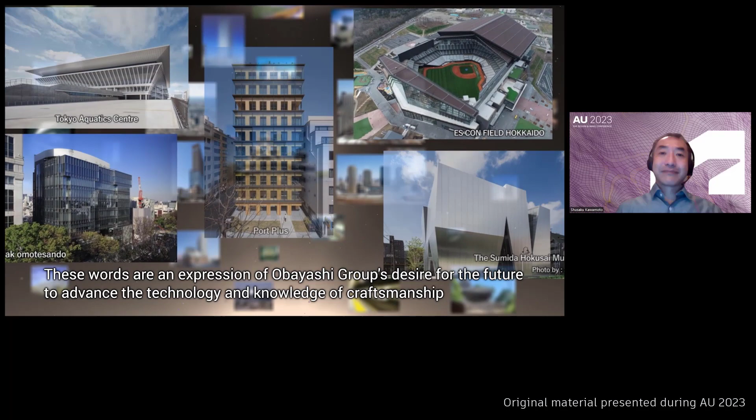Make Beyond: transcending the art and science of making things. These words are an expression of Obayashi Group's desire for the future to advance the technology and knowledge of craftsmanship we have cultivated over our history towards a new level that is in line with the current times, and achieve growth that goes beyond the existing business framework.

To contribute to realizing a sustainable society as stated in the Obayashi philosophy, the Obayashi Group outlines its 2050 vision in the Obayashi Sustainability Vision 2050. Towards the realization of sustainability of the planet, society, and people, the Obayashi Group will continue to take on the challenge of ceaseless transformation driven by talent and innovation to keep providing a variety of solutions for the sustainability of places where we reside, spaces, cities, and the environment.

What we are going to talk about is how we achieved a digital twin and single source of truth among various stakeholders in this large and complex project. We will be introducing specific use cases of Autodesk solutions covering these three topics. Hopefully, at the end of this class, we will have a better understanding of how to utilize digital tools to collaborate towards our sustainability and productivity goals.

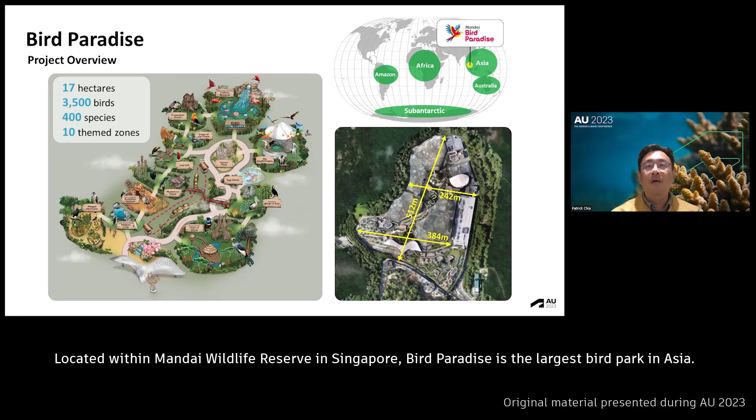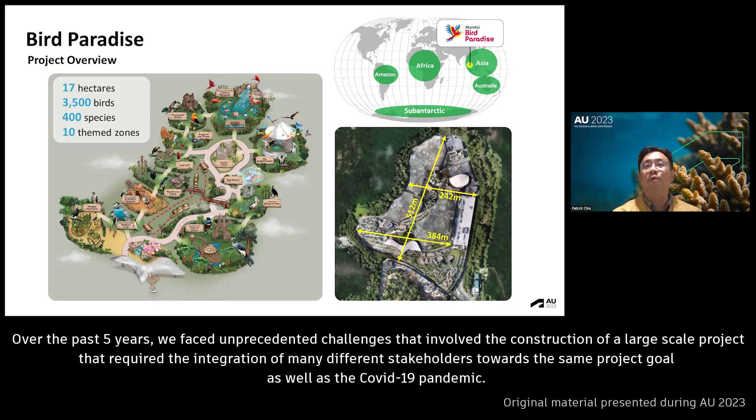Located within Mandai Wildlife Reserve in Singapore, Bird Paradise is the largest bird park in Asia. It replicates different habitats from around the world. Over the past 5 years, we have faced unprecedented challenges that involve the construction of a large-scale project that required integration of many different stakeholders towards the same project goal, as well as the COVID-19 pandemic.

We have created a short introduction video. Let's take a look at it.

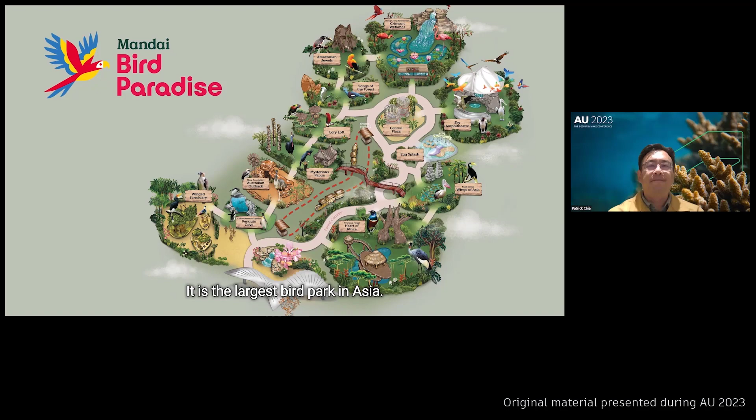Located in Singapore, Bird Paradise is a 17-hectare bird park that soft opened in May this year. It is the largest bird park in Asia. The park is home to 3,500 birds from over 400 species, with 10 themed zones replicating different habitats from around the world.

Visitors can explore 8 walk-in aviaries and immerse themselves in unique habitats at the 17-hectare Bird Paradise. We can also enjoy cascading waterfalls at the West Node or take a walk in surroundings inspired by the Australian outback. The wildlife park, designed to bring visitors close to stunning bird species, will be a platform for the organization to further its education and conservation work in the region.

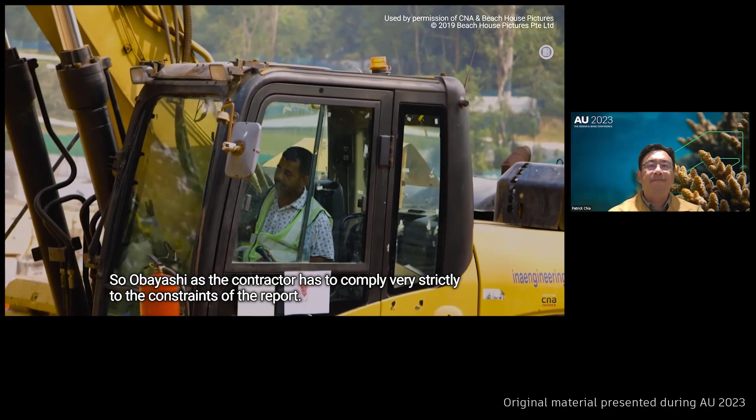The construction of the Mandai Bird Paradise project is a pretty challenging project for the contractors. Firstly, the location of the site is in close proximity to the reservoir and water catchment reserve. Secondly, we have a very stringent environmental impact assessment that has been done, so Obayashi as the contractor has to comply very strictly to the constraints of the report. For example, working hours and the type of machinery they can bring on site to manage the noise level. Thirdly, the need to preserve and protect the rich biodiversity in the area.

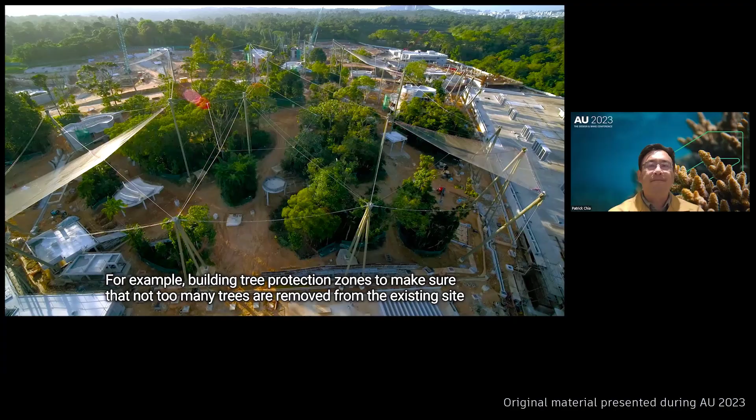For example, building tree protection zones to make sure that not too many trees are removed from the existing site, and then ensuring that there is wildlife connectivity throughout the construction period. In other words, wildlife can move in and around the construction area without hindrances, and also not to disrupt animal welfare at night, so working hours are also constrained.

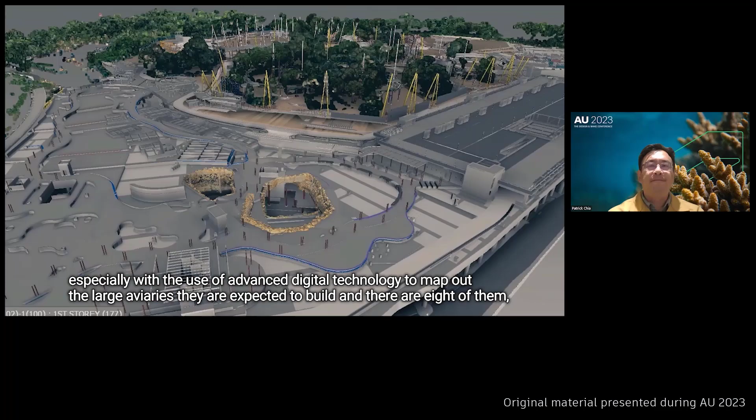I think Obayashi, in their own planning, has done a marvelous job, especially with the use of advanced digital technology to map out the large aviaries they are expected to build, and there are 8 of them, as well as the iconic bird entrance roof, which was very challenging.

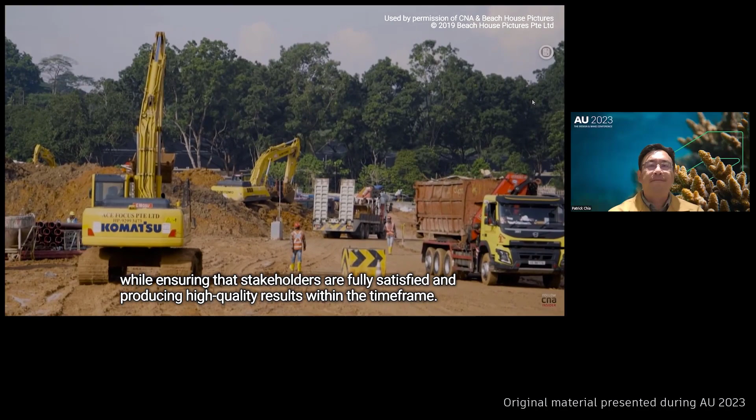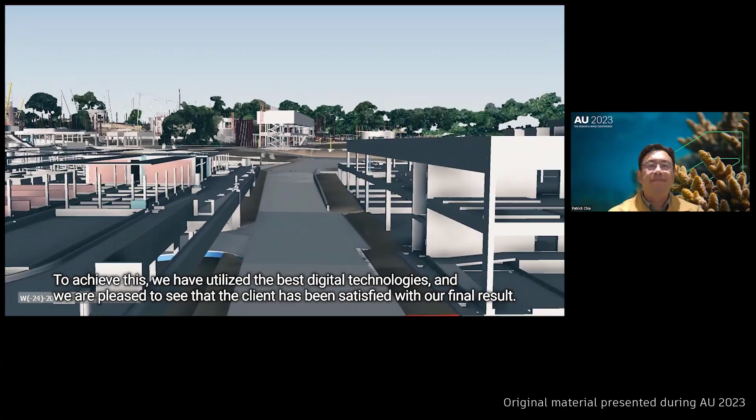Obayashi has been dedicatedly working with the idea of balancing nature preservation and new landscape realization, while ensuring that stakeholders are fully satisfied and producing high-quality results within the time frame. To achieve this, we have utilized the best digital technologies, and we are pleased to see that the client has been satisfied with our final result.

I'm deeply proud of our team's hard work, and I thank you for letting us be a part of this exciting journey. I sincerely hope that Bird Paradise will give everyone in the world dreams, hope, and inspiration. Thank you for your attention, and I hope you enjoy the rest of our presentation.

Let's dive deeper into the challenges and solutions. Nature first is the most representative key phrase of this project, striking a harmonious balance between conservation of nature, biodiversity, and the construction of large complex structures within the same time frame. We also had to collaborate with stakeholders from different disciplines, all working towards a shared objective.

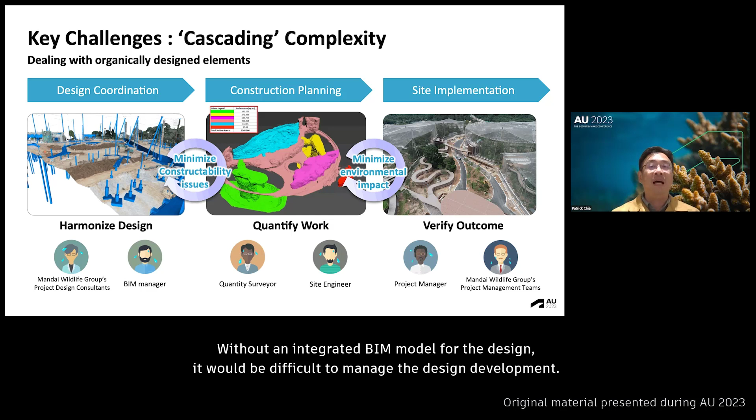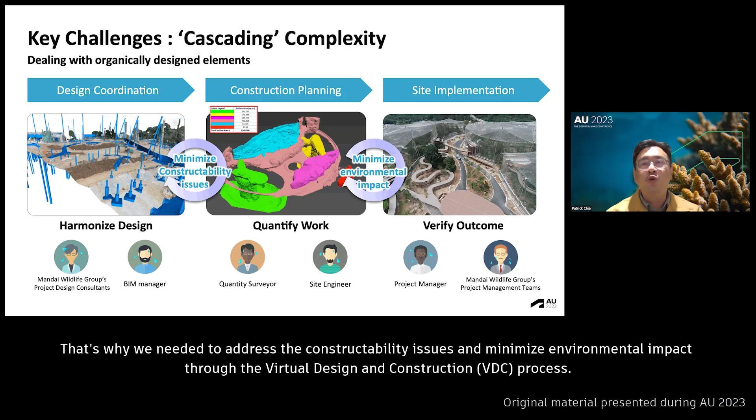We also needed to maintain the original natural topography as much as possible, and integrate feature elements that mimic nature with an organic design expression. There were no options to adopt standardization or traditional 2D drawings. Without an integrated BIM model for the design, it would be difficult, if not impossible, to manage design development. Work sequencing and site verification were also increasingly difficult due to the cascading complexity of the project. That's why we needed to address constructability issues and minimize environmental impact through virtual design and construction.

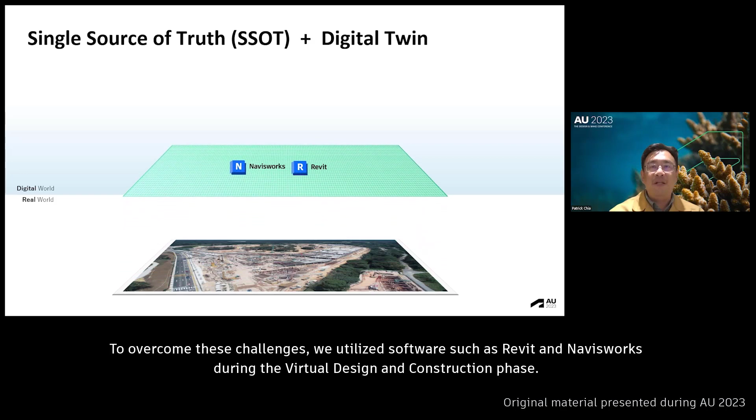To overcome these challenges, we utilized software such as Revit and Navisworks during the virtual design and construction phase. However, the real challenge was how to ensure alignment between the real and digital worlds. This was not an easy task and could only be achieved through collaboration of all project stakeholders. Only then can digital data be considered the single source of truth among stakeholders so that the digital twin can be fully utilized. Let's take a look at what we did.

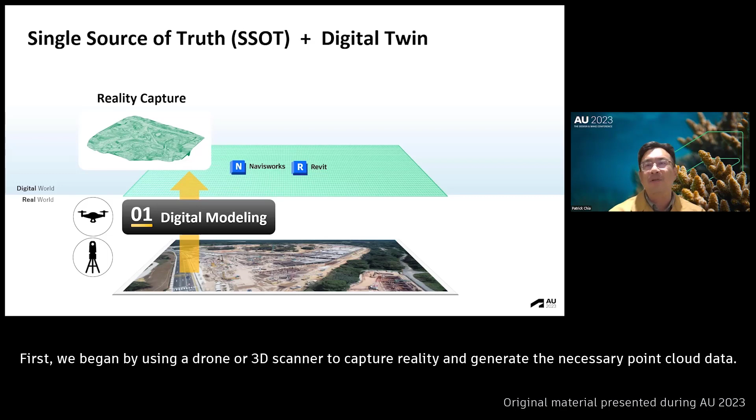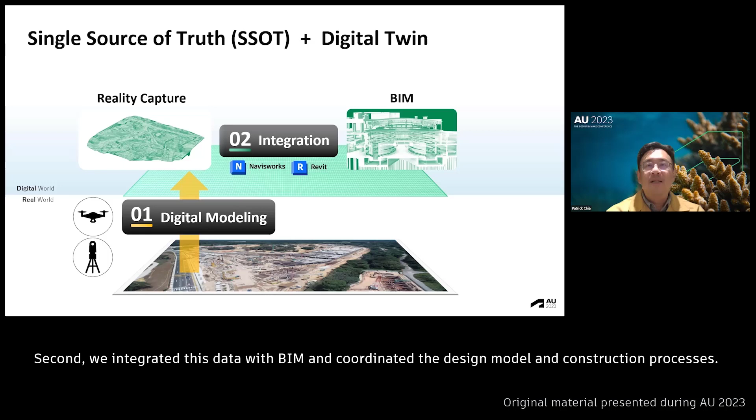First, we began by using a drone or 3D scanner to capture reality and generate the necessary point cloud data. Second, we integrated this data with BIM and coordinated the design, model, and construction processes. From there, stakeholders could then make important decisions based on this digital twin. As a result, we could effectively implement best practices on site.

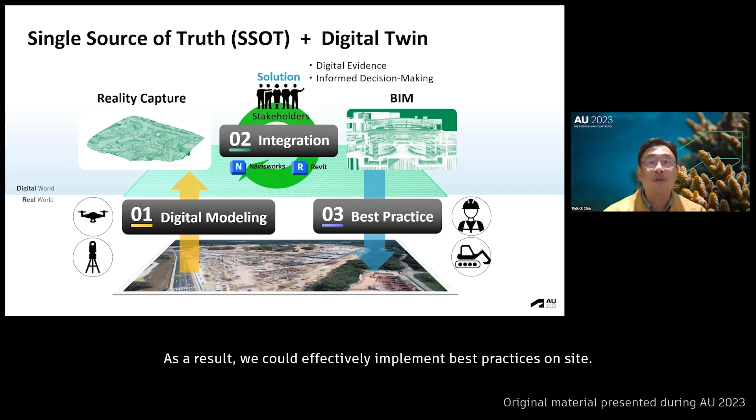Thank you, Patrick. Now it's time to look at our use cases and sequence. First is about digital modeling of nature.

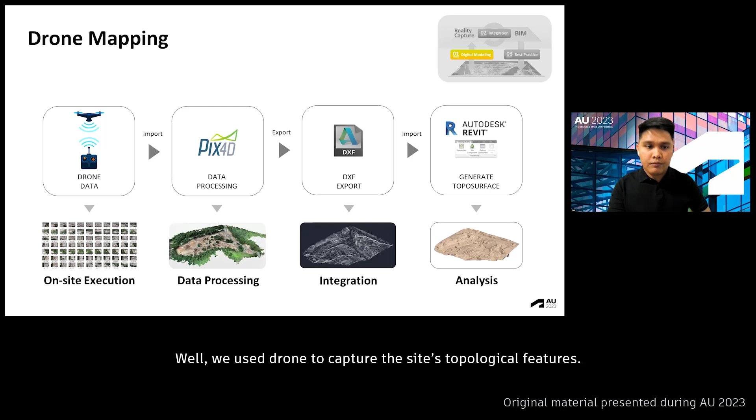Let me begin with this question: how do you create a digital twin that accurately replicates each individual tree as well as this vast and rolling terrain? We used drones to capture the site's topological features. All the collected data was processed through Pix4D and Revit to generate various outputs such as point clouds, orthomosaic images, toposurface models, and 3D contour lines, which were useful for our subsequent tasks.

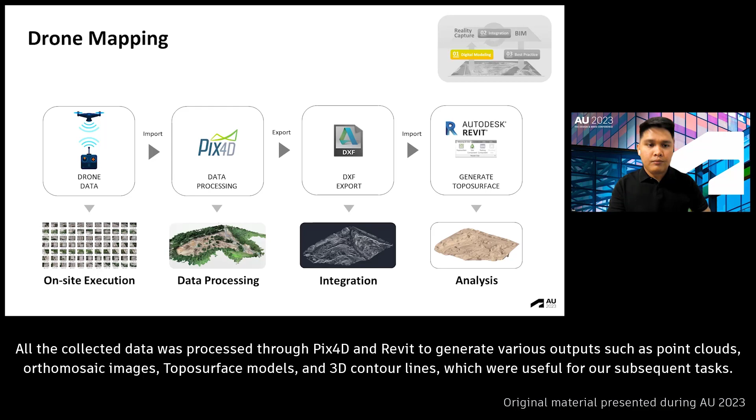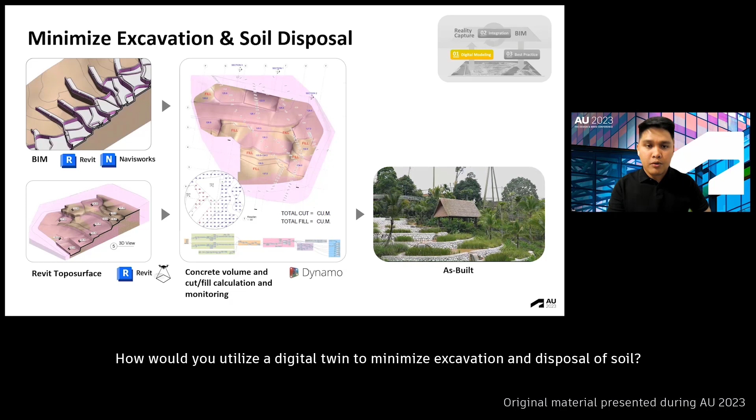Now let's look into our first use case: how will you utilize the digital twin to minimize excavation and disposal of soil? Traditional land survey methods are not sufficient for this massive development. Instead, we employed drones to map the entire site and generate a comprehensive toposurface model.

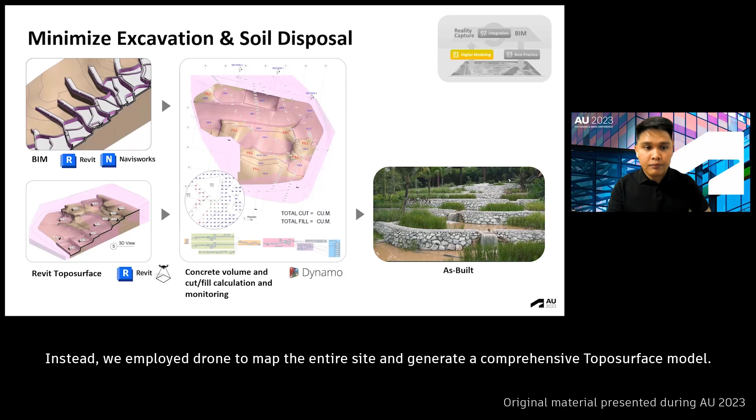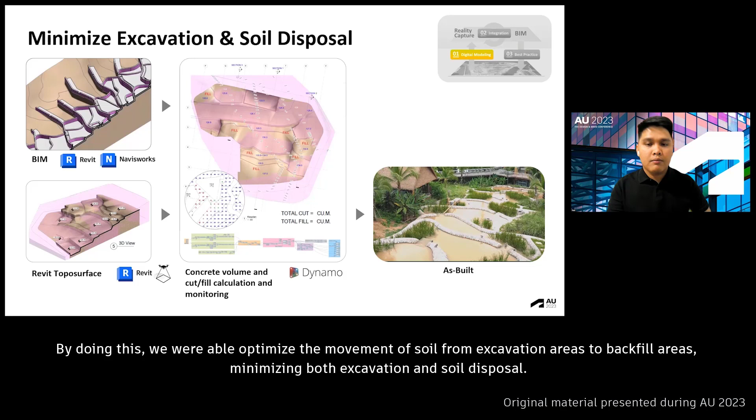This allowed us to analyze the level differences between the current state and the proposed levels using Revit and Dynamo. By doing this, we were able to optimize the movement of soil from excavation areas to backfill areas, minimizing both excavation and soil disposal. As a result, one of the outcomes of the 8 aviaries we have built is this beautiful terraced rice field landscape.

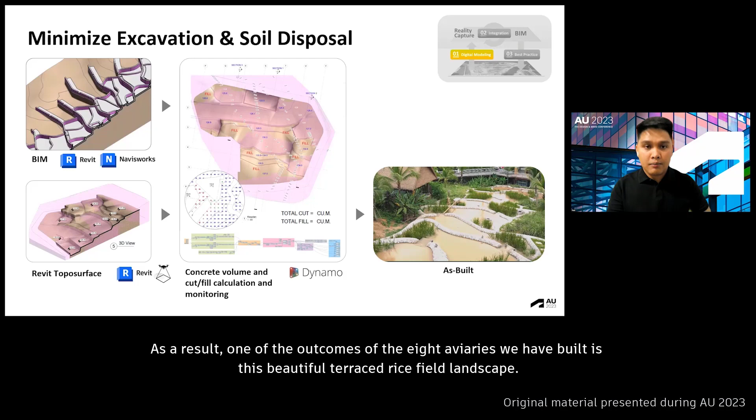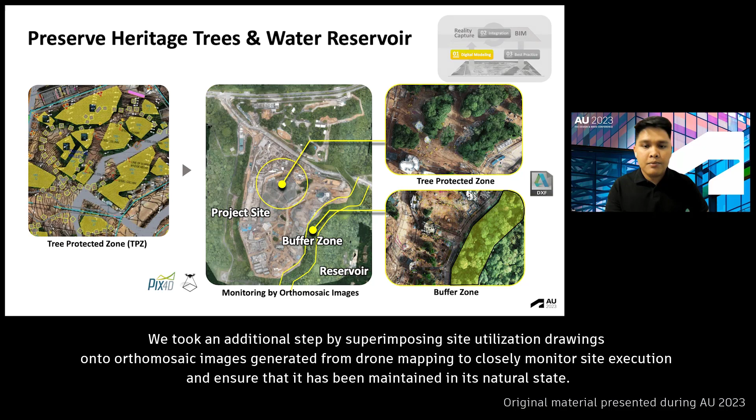Let's consider this next case: how do we use technology in the preservation of heritage trees and the water reservoir during the construction period? We took an additional step by superimposing site utilization drawings onto orthomosaic images generated from drone mapping to closely monitor site execution and ensure it has been maintained in its natural state. Without a digital twin, overseeing the environmental impact of each construction phase on nature would be challenging.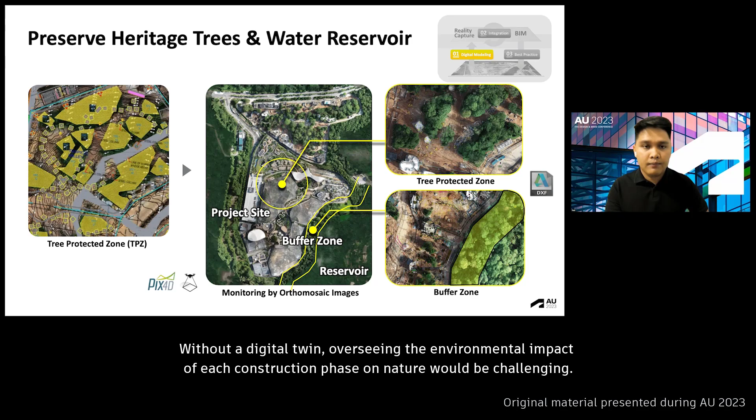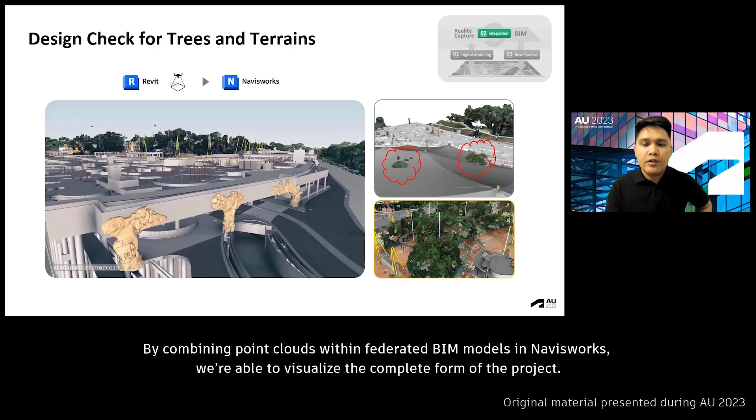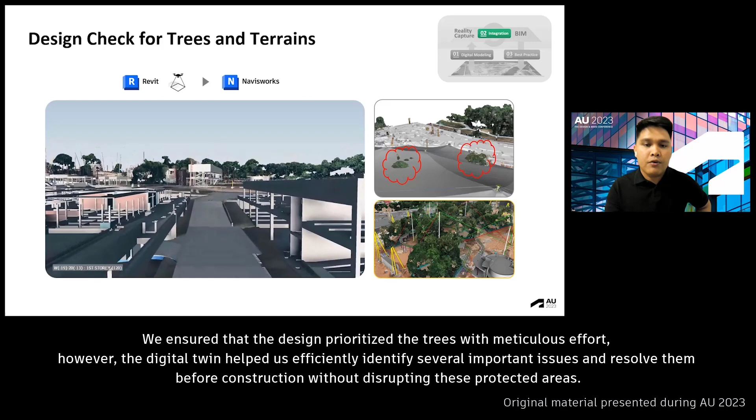Now let's talk about identifying and solving challenges by integrating nature and buildings. How do we use the digital twin to preserve existing trees and terrains? By combining point clouds with federated BIM models in Navisworks, we were able to visualize the complete form of the project. We ensured that the design prioritized the trees with meticulous effort. The digital twin helped us efficiently identify several important issues and resolve them before construction without disrupting these protected areas. This includes rock theming coordination process, which I will run through in the next slide.

This unique rock design was first presented through a scaled clay model. Subsequently, it was converted into a 3D surface mesh using a 3D laser scanner and optimized for seamless integration with the BIM models, forming the foundation of our digital twin.

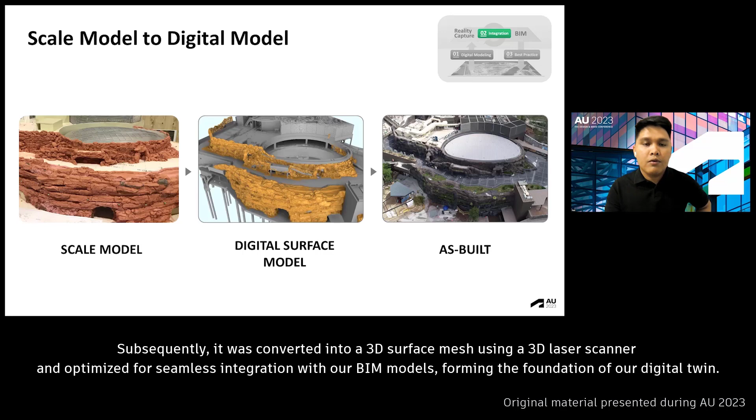This became a valuable tool for our client, consultants, and subcontractors. With this, we were able to evaluate design accuracy, ensure smooth design coordination, create detailed and schematic drawings, and accurately calculate necessary quantities.

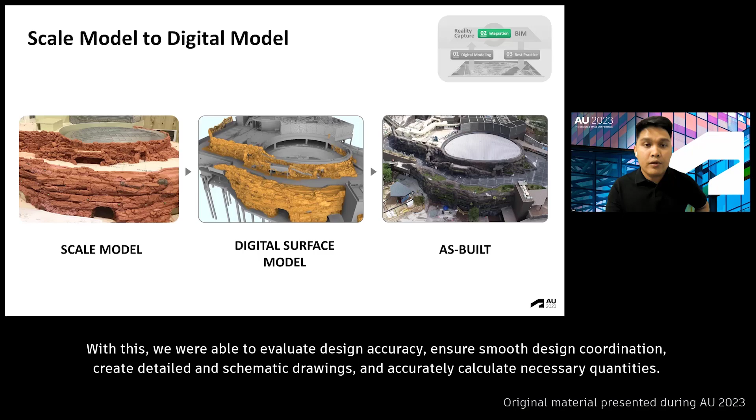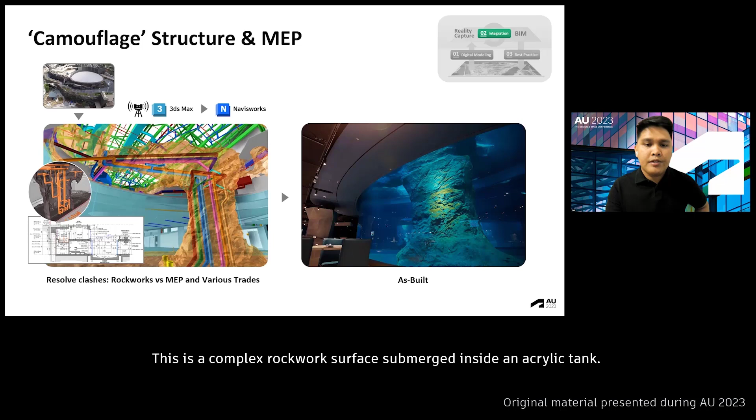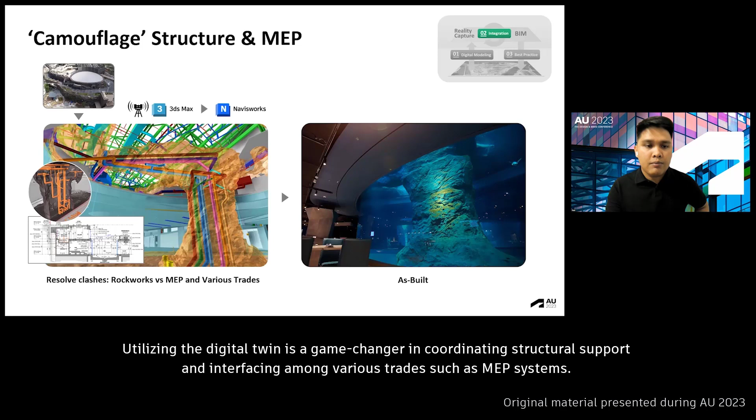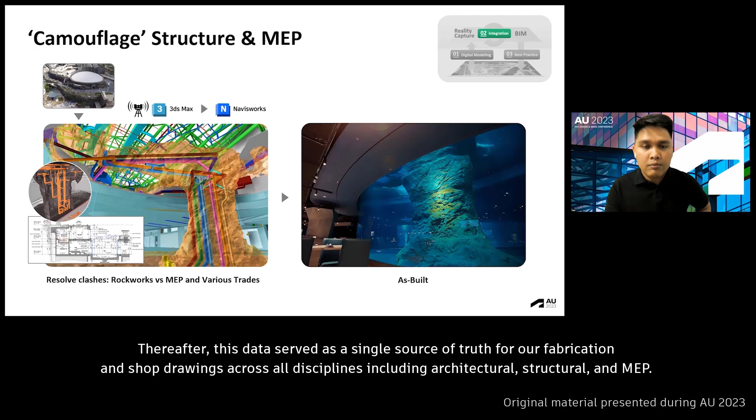Looking at this example, this is a complex rockwork surface submerged inside an acrylic tank. Utilizing the digital twin is a game changer in coordinating structural support and interfacing among various trades such as MEP systems. We fully coordinated all models and achieved precise positioning of all enclosed services within the rockwork surface. Thereafter, this data serves as a single source of truth for our fabrication and shop drawings across all disciplines, including architectural, structural, and MEP. As a result, you can see this breathtaking outcome.

Now that we have completely resolved all the challenges, we proceeded with the actual field implementation. Therefore, our journey with digital twin continued. In the following slides, I will introduce two remarkable cases. Let's start with the walkthrough aviaries, and how we use digital twin to construct such complex walkthrough aviaries.

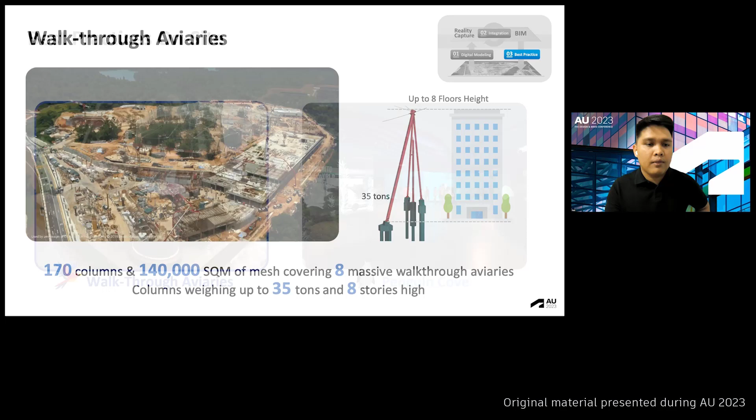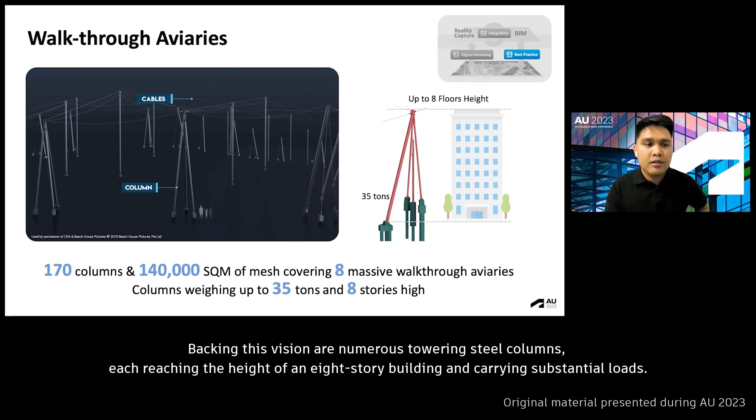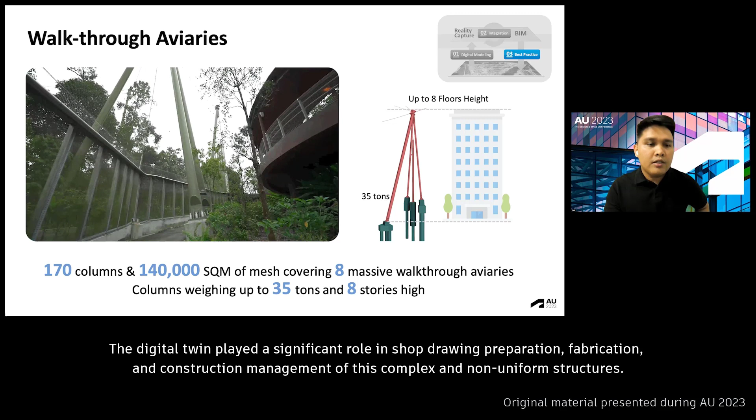Imagine a space merging nature and engineering with 8 massive walkthrough aviaries. Backing this vision are numerous towering steel columns, each reaching the height of an 8-story building and carrying substantial loads. These structures are covered by a massive mesh, forming an expansive sanctuary for birds to fly freely. The digital twin played a significant role in shop drawing preparation, fabrication, and construction management of these complex and non-uniform structures. Let's explore this further in the next slide.

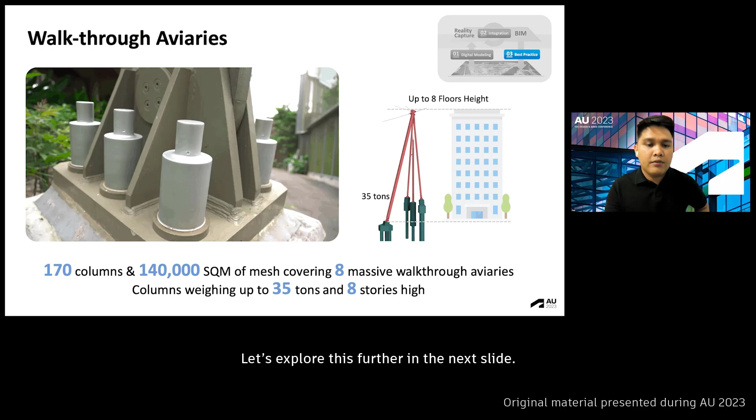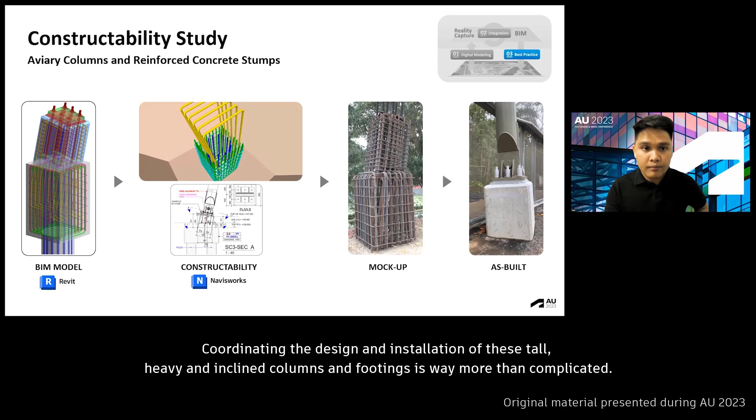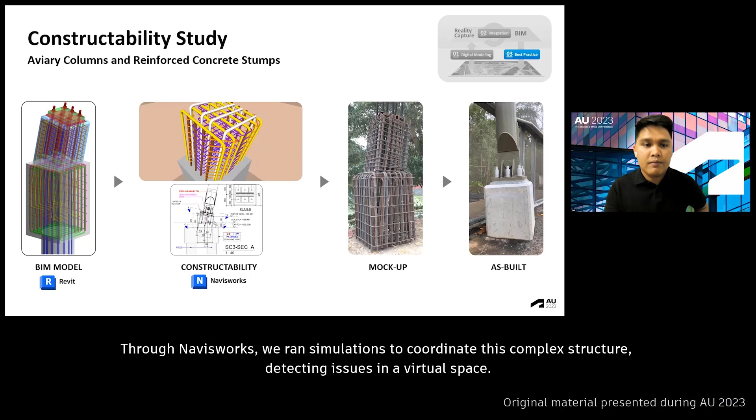Coordinating the design and installation of these tall, heavy, and inclined columns and footings is way more than complicated. It's not just two-dimensional, but it requires positioning and orientation along multiple axes. Through Navisworks, we ran simulations to coordinate this complex structure, detecting issues in virtual space. Once optimized, construction drawings are generated from this single source of truth data. Integrating BIM with engineering practices offers better accuracy and collaboration, ensuring the project aligns with its specifications.

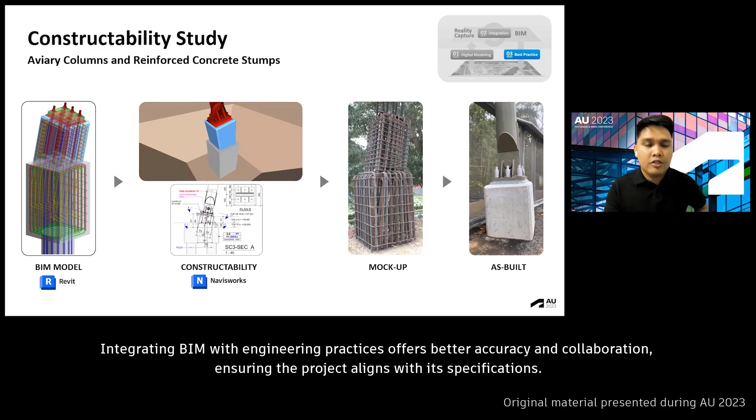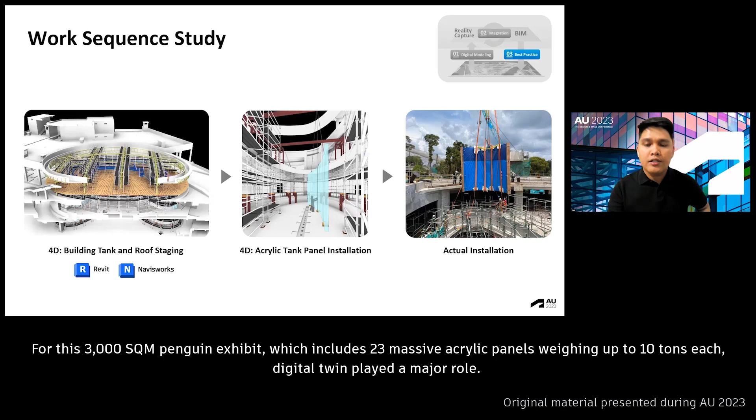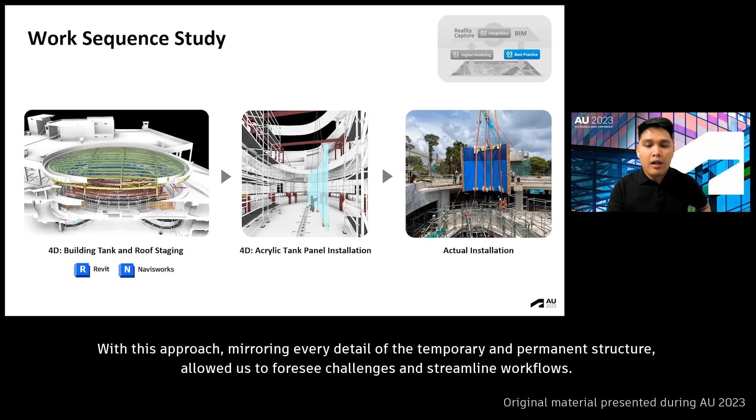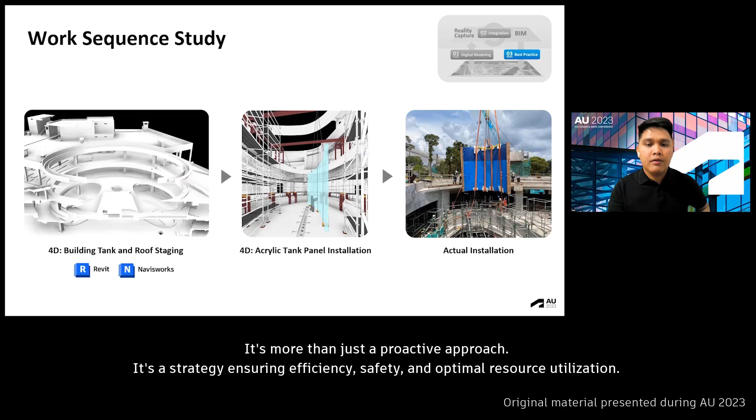Now let's talk about Penguin Cove. For this 3,000 square meter Penguin exhibit, which includes 23 massive acrylic panels weighing up to 10 tons each, digital twin played a major role. With this approach, mirroring every detail of the temporary and permanent structure allowed us to foresee challenges and streamline workflows. It's more than just a proactive approach; it's a strategy ensuring efficiency, safety, and optimal resource utilization.

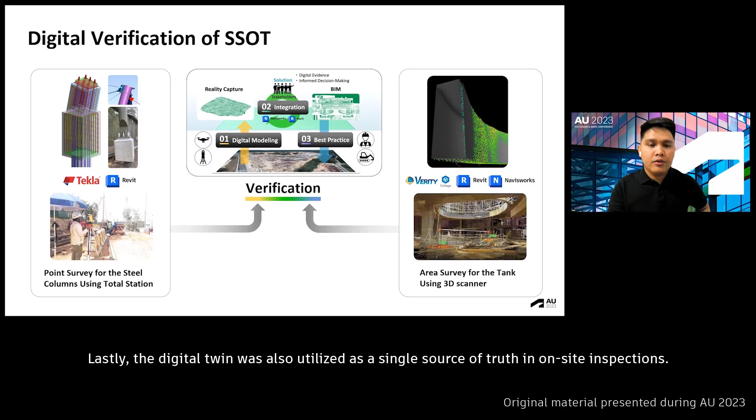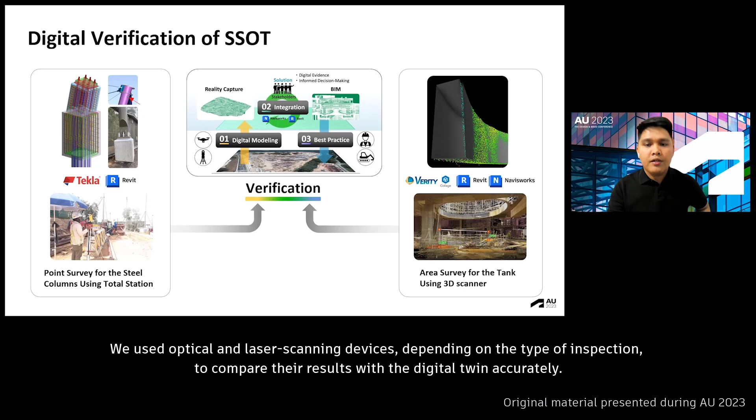And lastly, the digital twin was also utilized as a single source of truth in on-site inspections. We use optical and laser scanning devices, depending on the type of inspections, to compare the results with the digital twin accurately. This ensures that they meet the required accuracy and quality standards.

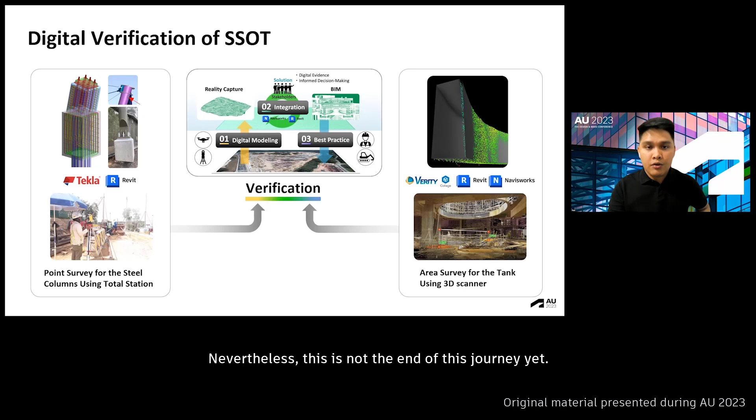Nevertheless, this is not the end of this journey yet. Our true main goal is achieving collaboration towards a shared goal among all stakeholders. Only through tremendous efforts of all involved parties did the digital twin become a reliable base and could bring us back to the idea of coexistence. In other words, this is the ultimate form of a single source of truth. Thank you, and back to you, Patrick.

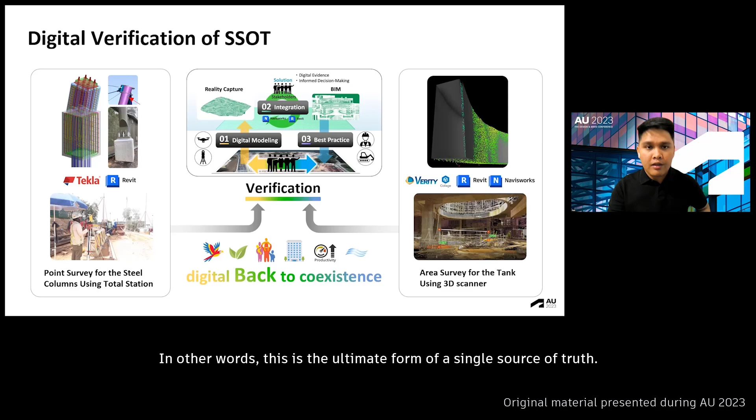In conclusion, we discussed how we successfully implemented a digital twin and established a single source of truth among various stakeholders in this large and complex project. We also covered the specific use cases of the digital twin, including digital modeling, data integration, and best practices on site. The tools we utilized, including Revit, Navisworks, and Dynamo, to name a few, have revolutionized our ability to digitally capture the complexities of nature while empowering us to make informed and strategic decisions, ensuring both sustainability and productivity. Today, we live in an era characterized by constant change and deterioration of nature.

At Obayashi Corporation, we are committed to the pursuit of nature preservation and economic rationality. To achieve these goals, digital solutions and Autodesk products will play an increasingly important role in the future. We, as Obayashi Corporation, aim to grow as a company that successfully continues to harness these digital solutions through continuous innovation. To conclude our presentation, we have created a 2-minute short video that summarizes the successful results of the project. Thank you very much for your attention.

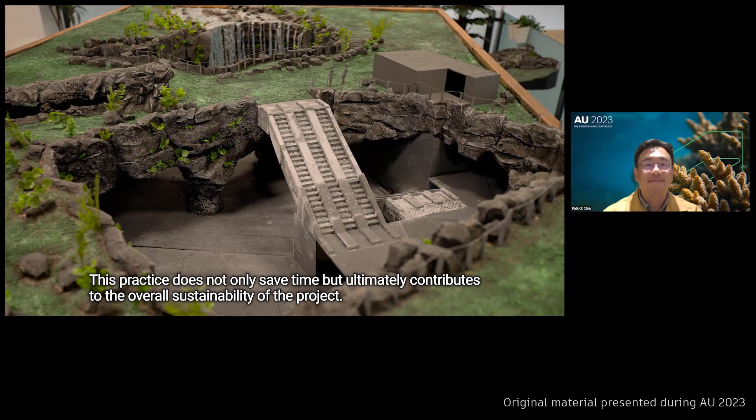Effective communication was key. Working closely with architect and design engineer, we used digital twin to identify potential clashes and refine our construction sequence in the project. This practice doesn't only save our time, but ultimately contributes to the overall sustainability of the project.

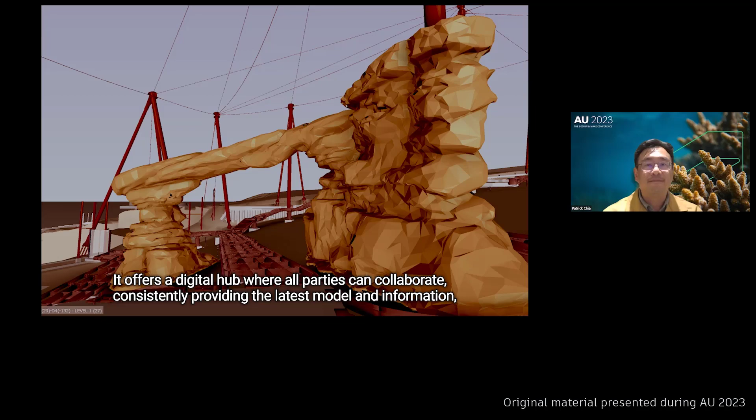Building information modeling has greatly assisted us engineers in the construction field. It offers a digital hub where all parties can collaborate, consistently providing the latest model and information, resulting in well-coordinated design and fewer conflicts. Due to the high complexity of the project, it was crucial to have a single source of truth data that everyone could agree on, both for design and construction. That way, we could all get our work done way faster and easier. Therefore, it is important to be implemented in the project.

Then I want to congratulate Obayashi as we recently opened the park. They have done a fantastic job in terms of a disciplined approach to balance construction, biodiversity, and animal welfare. Congratulations to Obayashi.